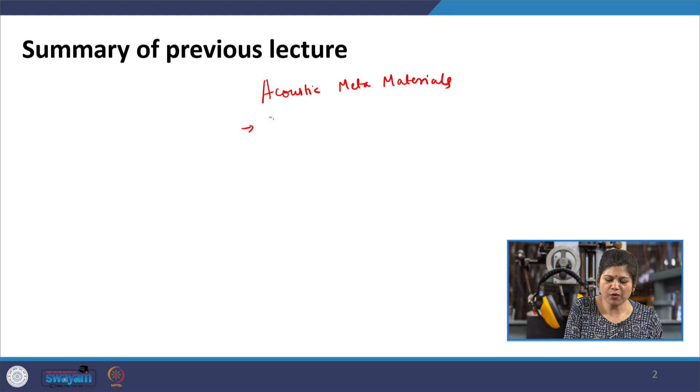We have started discussing in this lecture series the concept of acoustic metamaterials. One type of acoustic metamaterial is the space coiling metamaterial, which is a kind of passive metamaterial that uses a specific design.

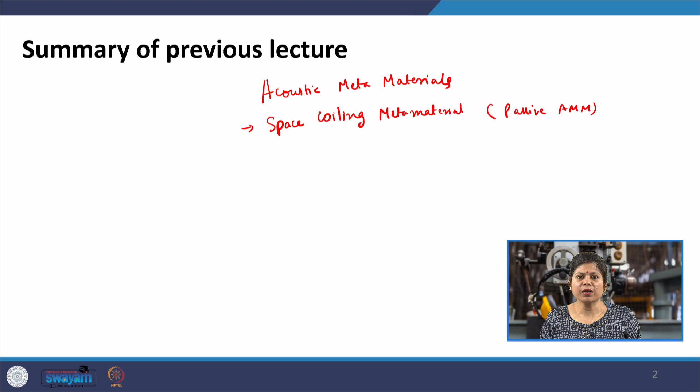When the wave is incident on it, the internal structure of the metamaterial is in the form of maze-like pathways. It forces the sound waves to go through these pathways, so that within a small physical size, the sound wave has to take a much longer pathway. So something like this - the wave is entering a metamaterial, and this shows the inside geometry and the kind of pathway the sound is taking.

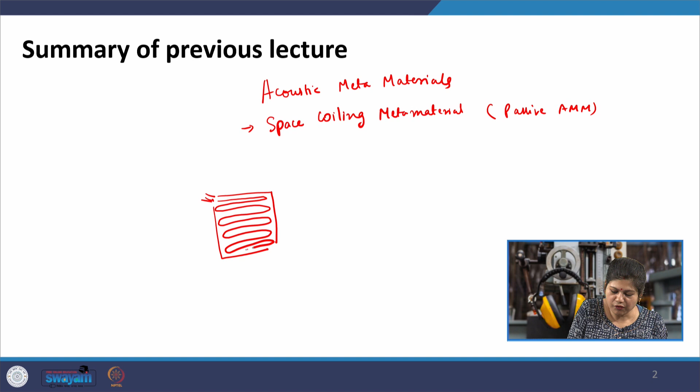Finally, when going outside, instead of a straight line path, the sound wave takes a much longer path, leading to slowing down of the speed. So traveling from point A to B takes much longer for these waves, which delays the wave and slows it down. This leads to phase delay and the slowing down of speed, and it increases the interaction of the waves with the internal structure, leading to more reflections.

If the structure is closed, it can act as a long pipe which has its own resonance frequency. Last class we derived the resonance frequency for a space coiling metamaterial, and at those frequencies there could be large vibrations in the air particles inside the labyrinthine structure, which can lead to further sound absorption at these frequencies.

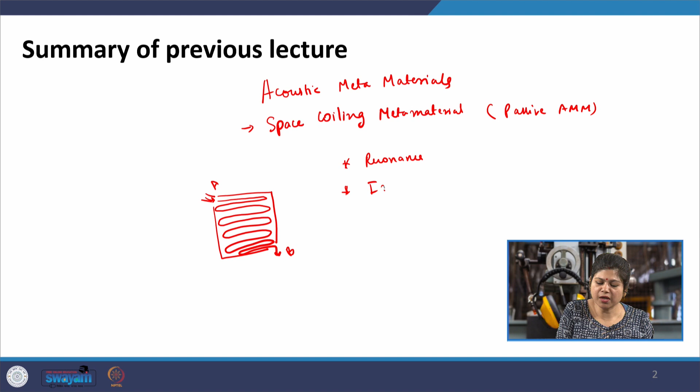We studied the phenomenon of resonance and also impedance matching, which happens when sound waves are incident at the resonance frequency. They are able to freely enter because the surface impedance of the metamaterial becomes very close to the surface impedance of the air itself, leading to minimum reflections. Most of the wave enters the material at this resonance frequency, and then gets trapped within this small compact size structure.

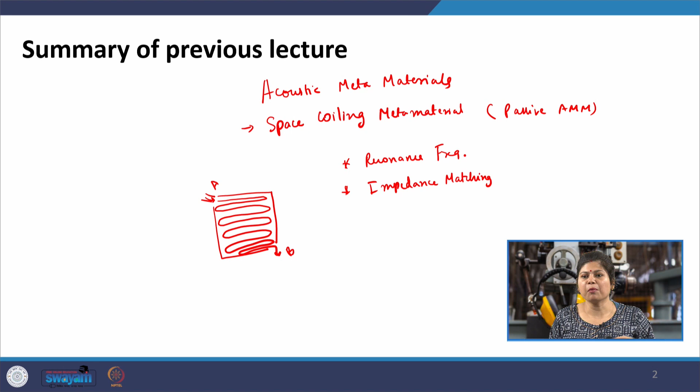So the working principle has already been discussed - what these metamaterials are. Today we will look at the advantages, the limitations, as well as some typical space coiling designs used for noise control and some applications of these space coiling metamaterials.

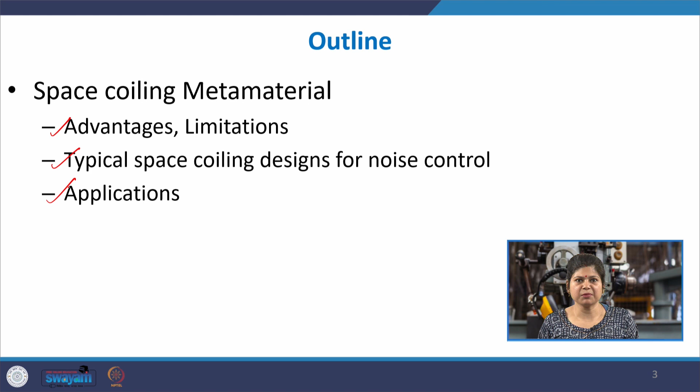Let us start with the advantages in terms of noise control that can be used in mechanical systems. Firstly, they have a very compact design. Right from the beginning, within a small physical size we have such elaborate pathways that the sound wave travels a lot longer, but confined within a small space. So compactness is one of the key characteristics and advantages of these metamaterials.

In most of these lectures I will refer to recent research papers that have been published, to give you context and relate the properties to what has been found in the research. For example, in this paper the total thickness is approximately 1 by 223 times of the working wavelength.

So, sub-wavelength - that was the term introduced in the last lecture. This shows that most metamaterials behave extraordinarily when the dimensions of their unit cells are much smaller than the wavelength of the sound waves they interact with. The thickness is so small, it is almost 1 by 223 times the working wavelength in this case.

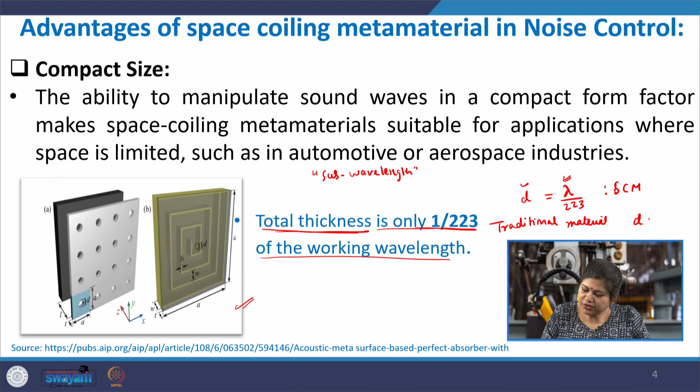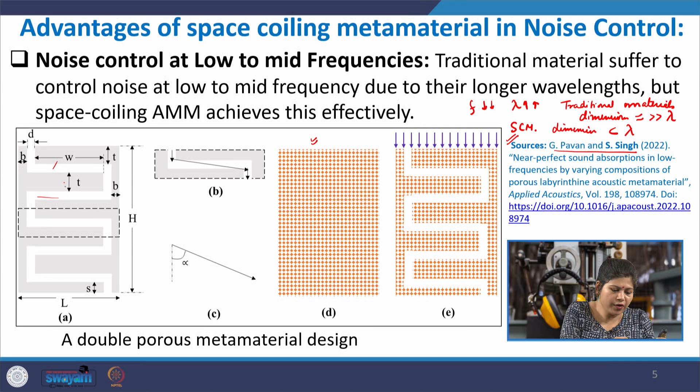From one of our researches, what we have found is that suppose we have this kind of space coiling structure where the sound is taking this twisted turned path, and if we keep increasing the number of folds. So here you have one fold, 1, 2, 3, 4, 5, okay, like that.

If you keep increasing the number of folds, what it leads to is the overall elongation of the labyrinthine pathway. So let us compare two structures. In one, the sound wave is moving like this, and in the other we have increased the number of folds.

So the outside dimension is still the same, only inside we have increased the number of folds. Then with this we are able to shift the peak frequency to a lower side. Why? In the last lecture we have already seen that the peak frequency, the resonance frequency of a space coiling metamaterial...

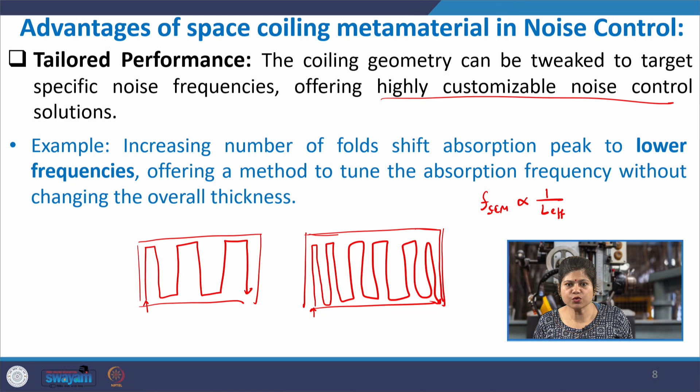is inversely proportional to the net length that the sound wave takes, because it is 2n plus 1 times of C by 4L. So these are the odd multiples of C by 4L. So it is inversely proportional to the length.

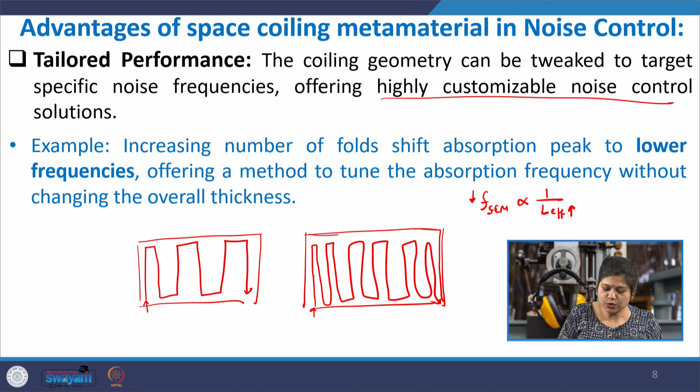So if you keep increasing the length, this is going to go down. If you increase the number of folds, the sound absorption peak shifts towards the lower frequencies. As you increase the number of folds, the length that the sound wave is taking gets elongated, because it is now taking a more elaborate pathway, which leads to the shifting of the sound absorption frequencies to the lower end while maintaining the same outside dimensions.

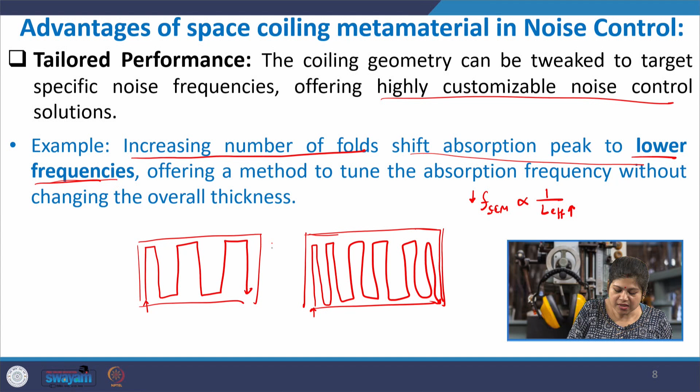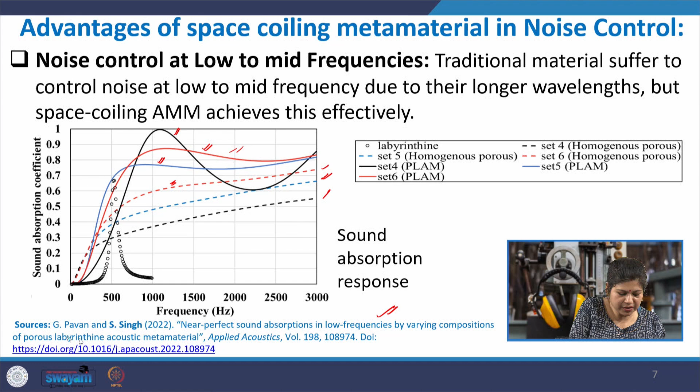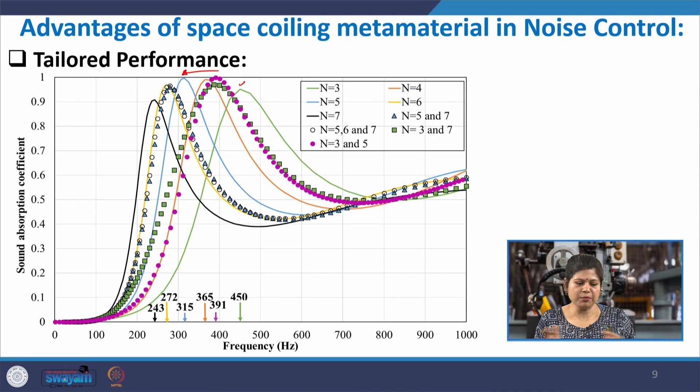So here you can see, this is taken from the same paper I am referring to, and I am taking the results from it to discuss the various properties. In this paper, what we have found is that as we increase the number of folds, the sound absorption peak keeps shifting towards the lower frequencies with the increase in N, as you can see. So for the same material having the same overall outside thickness, just by increasing the inside folds in the inside geometry, we have tailored the performance of the metamaterial.

Another advantage is that just like we can tailor the performance, we can also obtain multiple sound absorption peaks, and without adding any extra volume we can still end up adding multiple peaks. Now, suppose we are using a Helmholtz resonator, even there we can obtain more peaks, but we need an array of Helmholtz resonators.

This is going to increase the weight and the volume, because we are adding an additional element. Whereas in the case of space coiling metamaterials, without increasing the overall weight or volume, within the same structure just by changing some parameters we can obtain multiple peaks also.

If you change the hole diameters of the MPP, there is a peak corresponding to the MPP and then an absorption peak corresponding to the space coiling structure, and if you keep changing the hole diameters locally, you can get multiple peaks as well. Now, so it's not all hunky dory with the space coiling metamaterials.

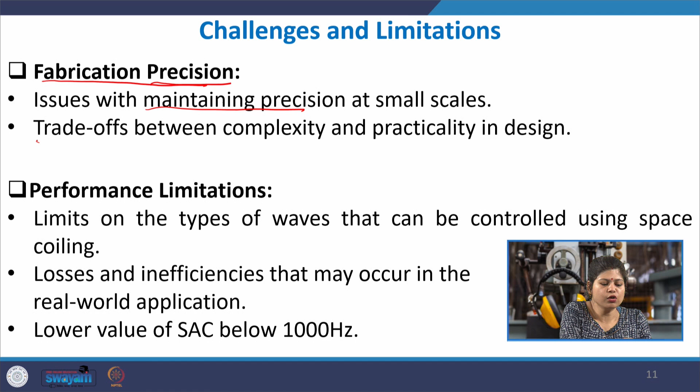You have to maintain that geometry, hence manufacturing precision is required. There is always a trade-off between how complex your structure is and how practical it is to actually manufacture. You can propose a very complicated structure theoretically, giving weird and new sound absorption characteristics, but can it be translated into reality? Can you really use that complex design and create real life structures? These kinds of structures have to be used commercially in machinery or mechanical systems, so they have to be manufactured in large sizes to be scalable and commercialized, and structural integrity has to be maintained.

There has to be reliability in the manufacturing of these structures. All the samples being manufactured have to maintain the same overall quality of precision. They also have to be manufactured in relatively lower time, and the structural integrity should be maintained at various temperatures, in the presence of gases and various atmospheres that the machinery might be subjected to.

As a designer, you can always design a very complex design, but it cannot always be translated into a practical solution. So there is always a trade-off, and that limits how much we can use this concept in a real life appliance. Sometimes even if you propose a complex design, you might not end up using it in a real life appliance.

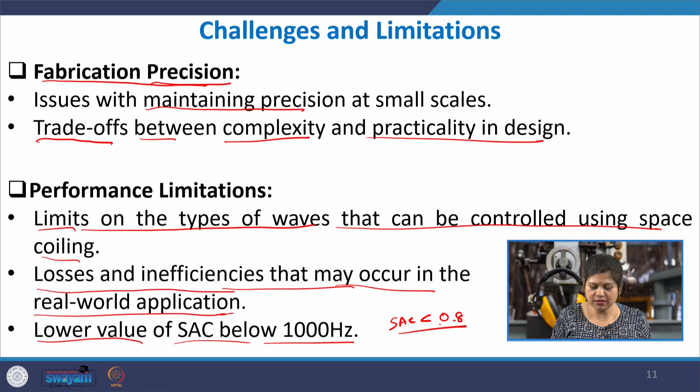In some of the lower frequencies, the SAC is still low. It is usually smaller than 0.8. There is scope to slightly raise it up.

One of the key challenges is the narrow band of sound absorption. In all these lectures, what we've seen is that suppose we have a resonance type of structure. The key limitation is that resonance happens whenever the incident frequency matches the fundamental frequency of the structure. So there is only a limited or narrow zone over which resonance is happening. If a structure attenuates sound only due to resonance, it will only have a very sharp peak. So usually you want structures, metamaterials or noise control structures that are not entirely dependent on the resonance phenomenon, but have other effects as well, for example viscous losses, thermal losses, and frictional losses.

If other mechanisms are also coming into play, they can be used to broaden the absorption curve, but if it is only resonance, it only happens pinpointed to a particular frequency, and in that case the range of absorption becomes very narrow. That is why other sound absorption mechanisms are the solution: the device or noise control solution should not be entirely dependent on the resonance phenomenon. There should be other mechanisms also incorporated in order to attenuate the sound waves.

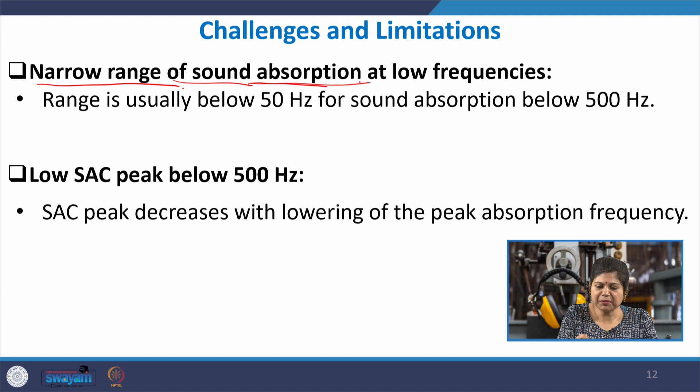For most of the practical designs suggested, the range for the space coiling acoustic metamaterial, or the range of sound absorption, is below 50 Hz. Typically, this is just typical, this is not always the case.

I am not claiming this happens for all the designs. Right now there are many designs which are giving you much broader absorption, but typically more than 80% of the designs existing are giving this kind of result.

And how are you measuring the range? Here in this case, I have considered the range where SAC is greater than or equal to 0.8 as the range. Then again, a low peak below 500 Hz has been observed.

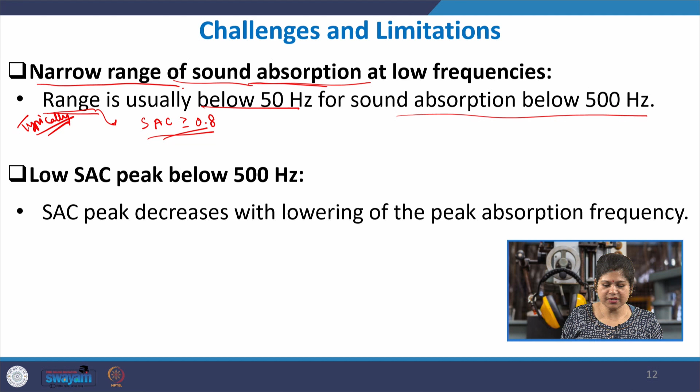Let us see an example from one of our research to see if these two phenomena are happening. This is a latest paper published by us in 2024, and what we see here is that we are having the same metamaterial. The outside dimensions are exactly the same, only within the inside we are increasing the number of folds, and as we are increasing the number of folds, the frequency of peak sound absorption is shifting towards the lower end.

But what you observe is that when the absorption response is shifting towards the lower end, it is also reducing the range over which the sound waves are getting absorbed. So you have here a much broader curve, and then slowly the curve narrows down as it moves towards the lower frequency, and there is also a slight reduction in the absorption magnitude as it is moving towards the lower frequency. So this is generally observed for most of the space coiling designs.

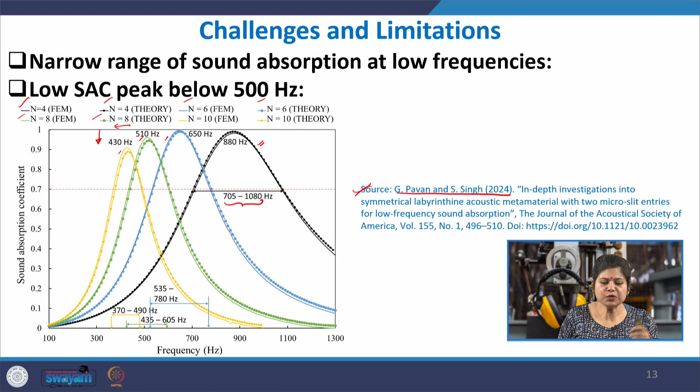Now let us see some of the typical space coiling designs which are being used for noise control. You have helical or spiral kind of coil structures. These helical structures, spiral coils, are tuned to target specific frequencies for low frequency noise absorption, and the sound wave takes this elongated helical or spiral shaped pathway.

The other are these labyrinthine structures, and in the research papers that we have published, which I was showing here, we have taken these kind of labyrinthine designs where we do not have a spiral or a helical structure, but rather we have straight turns, so straight channels which are alternately turning 180 degrees.

So these kind of straight channel pathways or labyrinthine maze-like pathways are easier to manufacture compared to these kind of helical and spiral structures, while giving similar kind of sound absorption. That is why they are more commonly used in noise control applications.

So they have easier manufacturing compared to the helical and spiral designs, and are simple in design, with similar performance as the spiral design, and hence they are more widely used. The straight channel pathways are being more widely used.

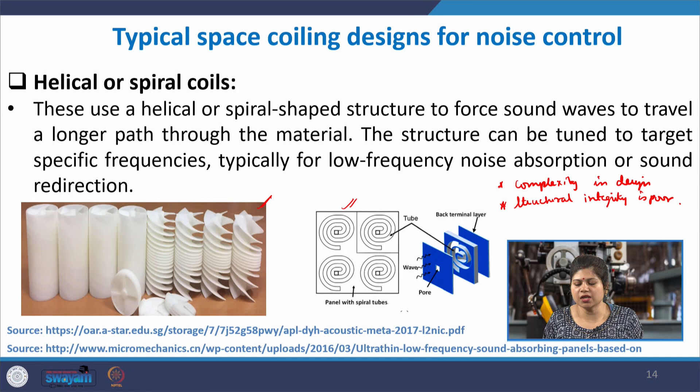Now let us see the key applications of these space coiling metamaterials. Firstly, obviously because our lecture series is on noise control in mechanical systems, we are only studying the noise control application. So the very first application definitely is sound and vibration control.

These space coiling structures can not only be used to control the sound waves, but also to attenuate the vibration through them, and the designs for the two are different. So any kind of elastic wave, whether it is a longitudinal sound wave that is passing, or whether it is a flexural vibration wave that is passing, these kind of space coiling structures can be used to target and redirect these waves and hence attenuate it while it travels along these structures.

Then some other applications beyond noise control is that you can make compact and efficient waveguides. What is a waveguide? Just like we have an optical waveguide, we have an acoustic waveguide. So what is an acoustic waveguide? It is a structure used to direct the sound waves in some intended pathways.

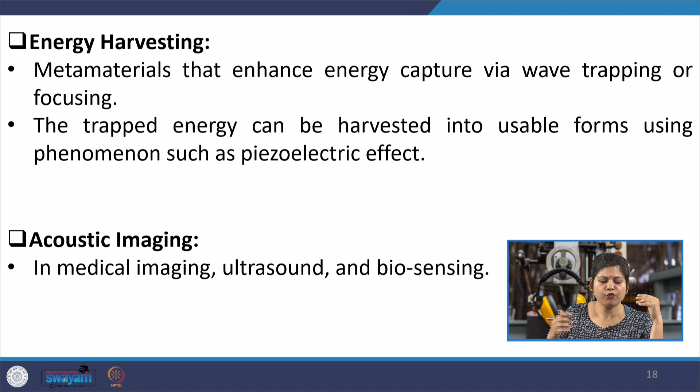Then energy harvesting is a relatively new concept, where these metamaterials are showing potential. There is not a practically available solution yet, but theoretically and numerically, concepts have evolved demonstrating that these metamaterials can enhance energy capture. They can be used to trap and focus the sound waves and convert them into usable forms using the piezoelectric effect.

So what happens is that, just like they can be used to create acoustic waveguides, we can have some space coiling structure built which can be used to direct and focus the sound waves into a localized region. So let's say all the incident sound waves are getting focused into some localized regions. This vast amount of sound wave is now getting concentrated and localized into this small region, and then we can have some piezoelectric phenomenon or piezoelectric material.

So the large amount of sound wave is now getting concentrated into a small zone, which is increasing the acoustic energy a lot. So the vibration, or the amplitude of vibrations of the particles, has increased manifold, and this is then getting converted by the piezoelectric effect. So you can have a certain membrane-like structure where the concentrated sound waves are incident on some membrane, and then they pass through some piezoelectric kind of patch.

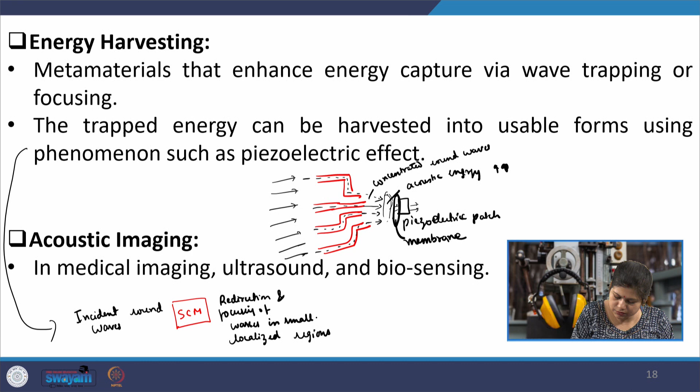And then the energy is trapped — high acoustic energy is trapped, which is incident on the membrane and leads to very high membrane vibrations. Then the piezoelectric patch converts these high vibrations into electricity. So this is just a basic kind of schematic of how energy harvesting happens.

You trap the sound waves and focus them into localized, small confined regions, where high acoustic energy is trapped. There is a light membrane in that region, and these high intensity waves incident on the membrane cause it to vibrate heavily. A piezoelectric patch is attached at the other end of the membrane, so these large vibrations drive the piezoelectric material, and the vibrations get converted into electricity by the piezoelectric effect.

In the same way, just like fiber optics, acoustic imaging can also result. If they can redirect and focus the sound waves, we can get good imaging in medical fields, ultrasounds, and biosensing — these kinds of applications can be used. So with this, I would like to close this lecture. Thank you for listening.